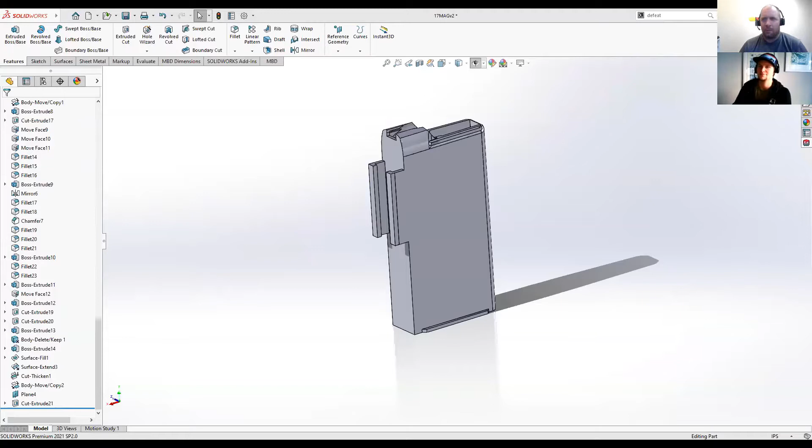I think probably for me, one of the first things that I really wish that I had known - I'll go ahead and show you actually. Can you see SOLIDWORKS? Yep, I got you. So one of the first things that I really had wished that I had known - let me go and turn these on.

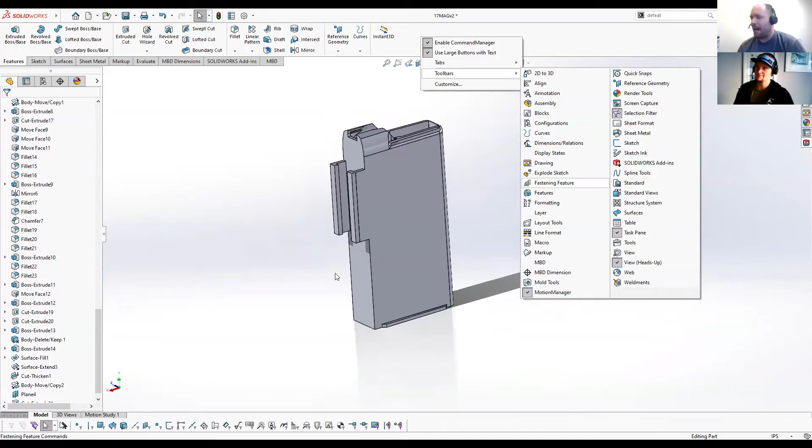Filters are one of those things that just got me. It's something I don't use all that often. So if you get a filter turned on, like my face filter or the surface filter, I'd have this filter icon and couldn't click on anything. I'd be selecting it and man, just ridiculous, so frustrating.

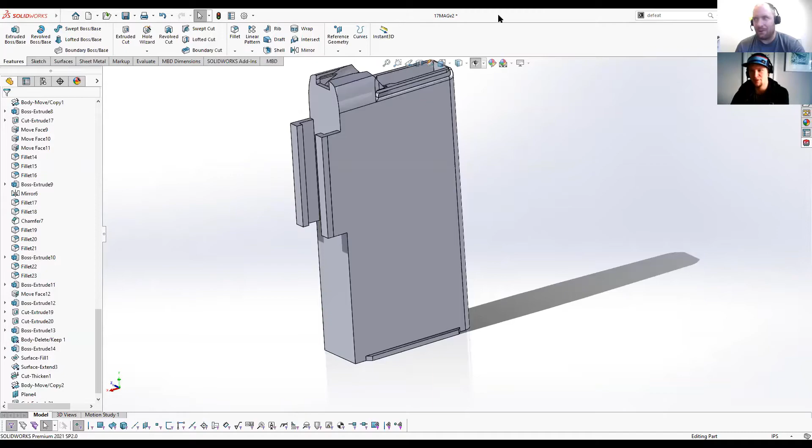What I ended up doing was honestly just closing SolidWorks and opening it back up. If I had known that all I had to do was press the F6 button and that thing would go away, that would have been awesome. That's one of those things, man, I just wish I had known. You're so right there with me, it took me a bit to figure that out too.

I remember seeing that little funnel icon and not knowing what it meant. I'm just fumbling around, pounding on the keyboard, trying to get stuff done and learn SolidWorks. And all of a sudden you can't create a sketch on a face that you selected. I did the same thing, closed the program down to see if I could figure it out that way.

I think probably the third thing after file referencing and filters, for me, I did a lot of frame design with standard structural shapes, and I used the toolbox for that. My assemblies were just garbage because of the way I used it, and I just didn't know how to do it any better. That's really what Weldments are for, and multi-body part design in general. Knowing how I could design things even in the context of the same part, relate them together, and easily make changes without having to start from scratch or break a bunch of mates and go fix stuff.

So the toolbox has some of those structural members in it, right? Yeah, I think that's the most common misconception I hear from people, that toolbox is required for frame design and that kind of stuff, which is definitely not the case. Weldments is there for everyone to use, but people new to SolidWorks think standard stuff like tubes and I-beams should come from the toolbox. It is in there, some of it, but the profiles that come with the Weldments feature are a lot more comprehensive, especially with the configuration specific Weldment profiles added a few years ago. That's a game changer. I remember my Weldment profile libraries and how many files were in there before they added that. That was a pretty big deal. I'm a fan.

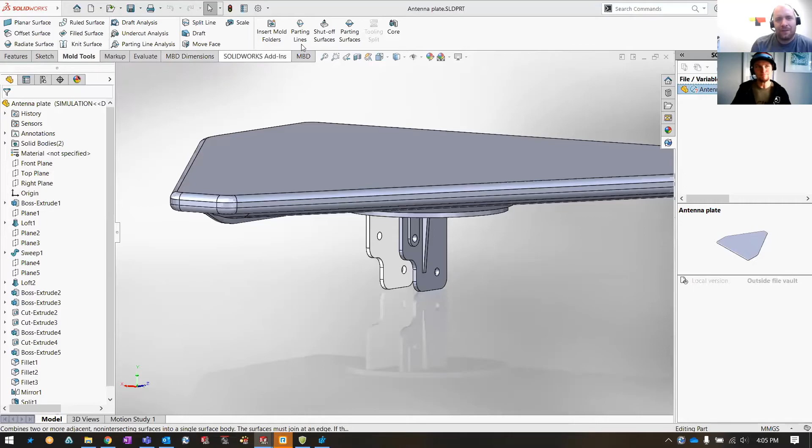My favorite feature is probably just to the right of that, the move face feature. Oh yeah, use that all the time. I love some move face. I use that one a lot for 3D printing. If you need to add a little bit of clearance, that's a sweet feature for that.

We were talking earlier, I think I threw the parts away, but I printed some parts and I didn't have the right wall thickness. I could have adjusted in my slicer, but oh man, my prints looked like garbage. I just used move face to bring that in just a little bit because I didn't really want to change my slicer settings, and the print turned out just amazing after that.

That's awesome, such an easy feature too. People might hate you a little bit when they look at your feature tree after you've done a few of them. Yeah, for sure, I've hated myself in a couple situations like that, like, where did this come from? Doesn't matter, it's just another move face anyway, so it's all good. Yep, let's move it back.

Move copy bodies is another one that kind of fits in that category too, which we won't get too far into, but I've added way too many move copies in part designs before.

Nice, so what's that put us at? We're at, I think, four things we wish we knew. Yeah, so probably the fifth one, I'd say probably the RX tool. Honestly, there's so much good stuff in the RX tool. You seen SOLIDWORKS? Yes, sir. Awesome.

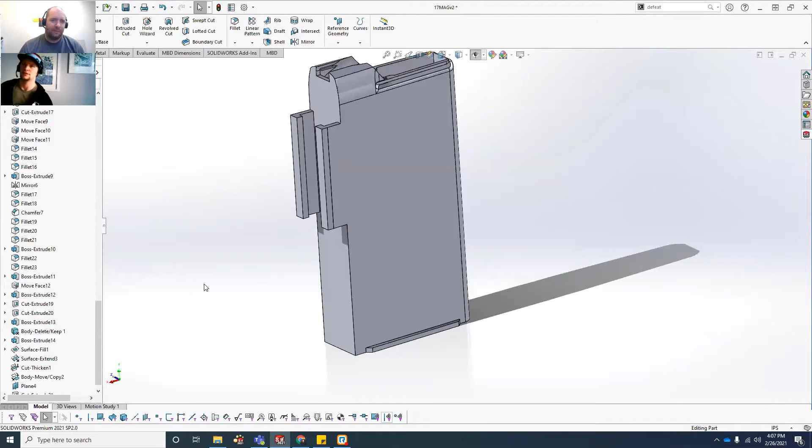So the RX tool, I'm going to close SOLIDWORKS here. You can find it from their start menu. If I pop it open, like I said, there's so much good stuff in here. If you're troubleshooting graphics card issues and stuff, you use OpenGL mode. If you think it might be a settings issue and the graphics card thing didn't resolve it, you use tools, option settings to bypass all your setting stuff. The benchmark tool, where you can run the benchmark and see how your hardware compares to other people's hardware. I think one of my favorite recent enhancements to it is probably the reliability check, where you can see what's been happening—has this thing been crashing, has it just been closing like normal, what's been going on.

I've been writing some programs and stuff for SolidWorks, so I have a little bit more unusual activity than I normally would. But yeah, that's more to talk about my programming skill than anything.

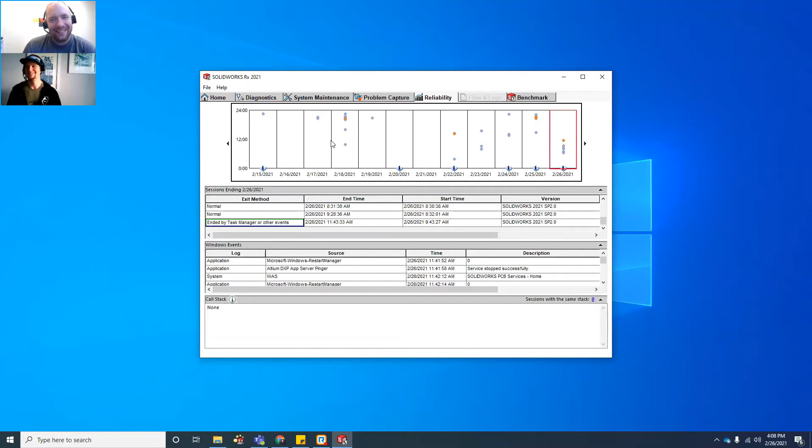Then you also have system maintenance. I don't think anybody ever uses it, but it's there to clear out all these temporary directories that SolidWorks stores things in that get full and slow things down. You also have your diagnostics tab, which you check to make sure things are set up properly, like checking your graphics card driver and making sure nothing is obviously broken on your system.

This page in particular is huge for me, because both of us are supporting different versions of SolidWorks at any given time. I have to do installs pretty frequently, so I'm constantly checking this kind of stuff, like is my graphics driver up to date. This is a great place to go for it, and you have a link right there to get your latest graphics card driver.

And then probably the problem capture is probably the one that most people think of, where you can come in, if you did have an issue, record it, zip it up, and send it to somebody.

From a support standpoint, probably the thing I didn't know was that the RX tool can open up an existing pack and go. So if I went somewhere where I created one, I can open that up and see different information about that system, all their system logs or whatever was included inside that pack and go. So yep, there's a ton of really good stuff in there.

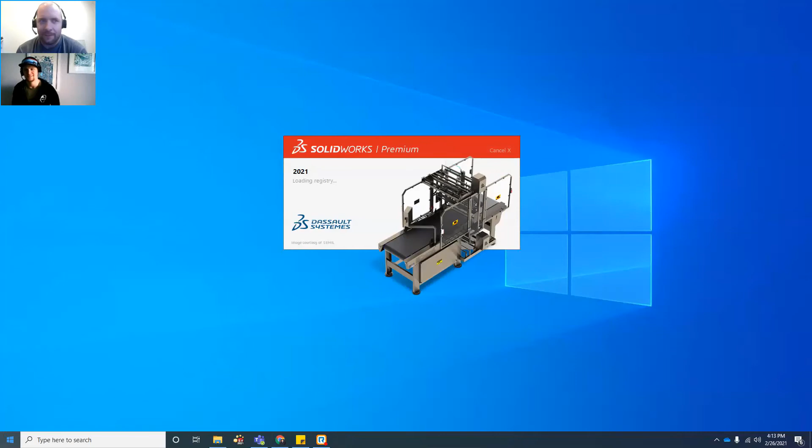So I'll go ahead and fire SolidWorks up real quick. Let's make a sheet metal part. Guys, just remember that I'm the PDM guy, so when you're seeing me doing some SolidWorks stuff, it might be questionable. So let's go ahead and just make a box or something really quick, and fully define the sketch.

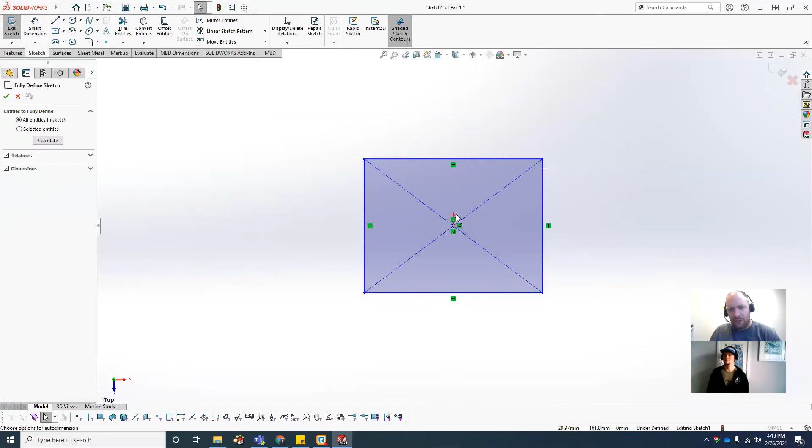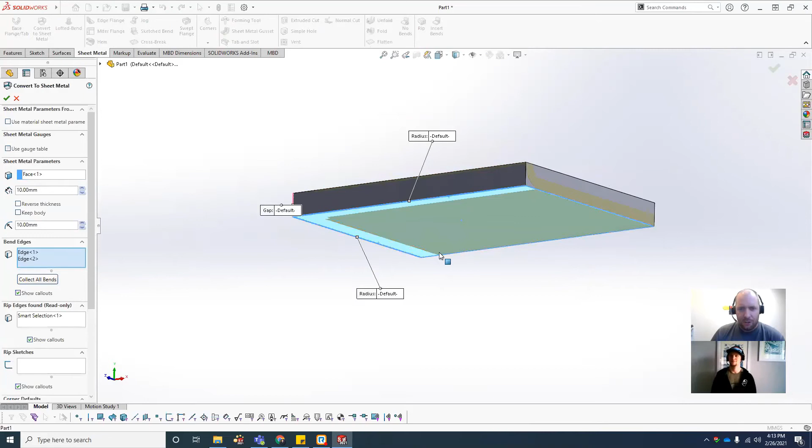And we'll just extrude it over in the metric system. I could use all of my fancy sheet metal tools, but I'm just going to use convert to sheet metal because it's fast, and I'm not really here to show you sheet metal per se, just to fix a sheet metal problem. So you took a boss extrude and made it sheet metal?

Mind blown. Got some funny looking corners there.

You actually used another one of my favorite features there too - Fully Define Sketch. I think that's another one a lot of people don't know about. So we have our sheet metal part, right? We can flatten it. Looks good, right?

Let's just go ahead and save it. Just gonna call it part 1 because I can't think right now while I'm trying to click and talk and do other things. So I like B-size drawings.

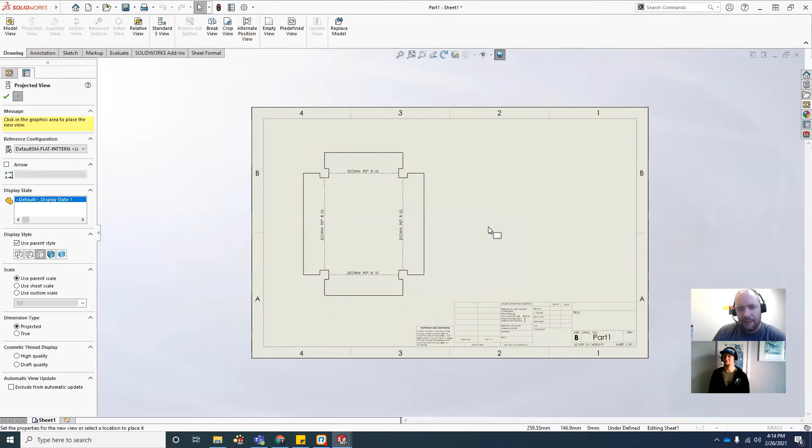And we can see that, so we should be able to just pull out our flat pattern right here. Boom, right away. Got our flat pattern. And from our view palette, we could also just throw in an ISO or something, maybe.

Yeah, so that's part of the drawing automation that's built into this, right? You got your part where you're able to access the flat pattern, but it's going to throw it right on your view palette there, so you can just drag and drop on the sheet real easy.

And this is, I think, where people go wrong right away when they create the drawing. As soon as I drop that view on there, that's where things go wrong for people. In my model, all I had was a default configuration, right? As soon as I drop it on a drawing, it creates a derived configuration underneath the default configuration - this flat pattern.

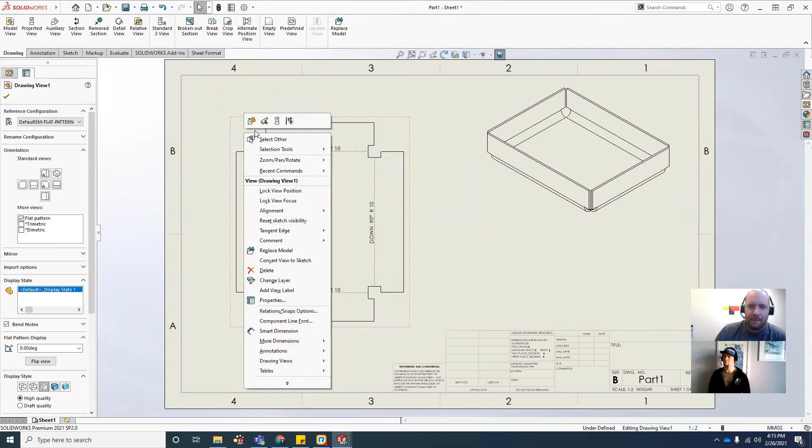So how do you get in this scenario where you can't flatten the part? Basically, people will open this up and start making changes to it. But they'll be, and not even realize they are, in that derived configuration that's active. They'll come in and essentially configure that feature by suppressing it, right?

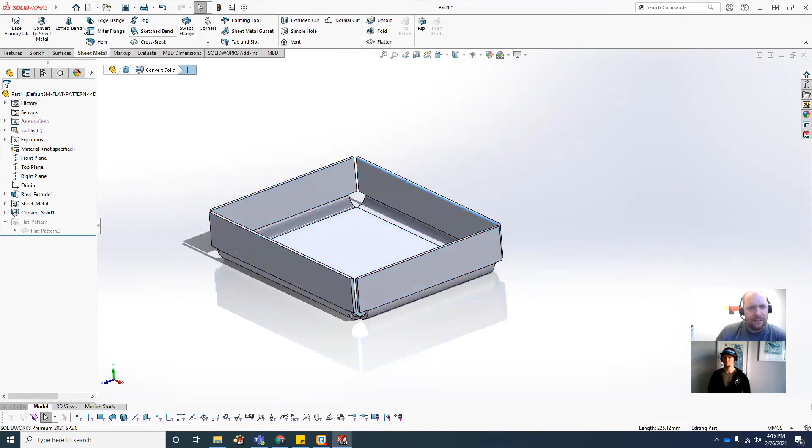And then they might just come in and add a flange or something off of that, right? And they'll go back to their drawing, and they're like, well, this is the flat pattern, I don't see why that's not working. It's because the configurations are wrong now, right?

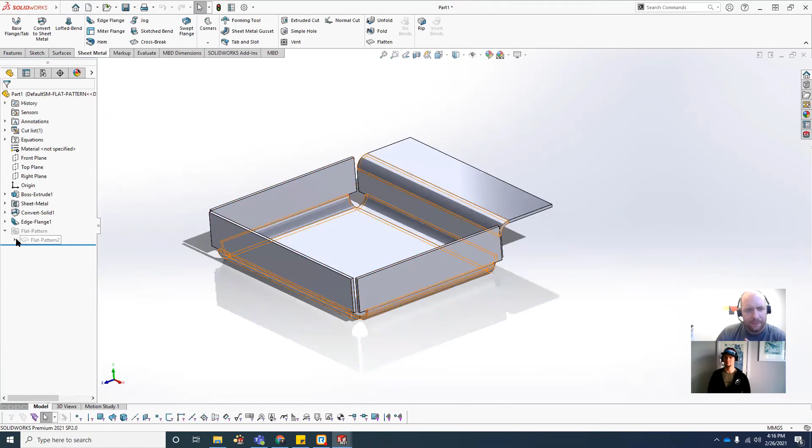So you got to open this thing up, go down to that flat pattern and unsuppress it, right? And what I usually recommend is to just look at your configurations before you go back. And if it makes it easier, honestly, what I do is use this flatten button, unclick flatten, and go back to your drawing, and everything should be fine.

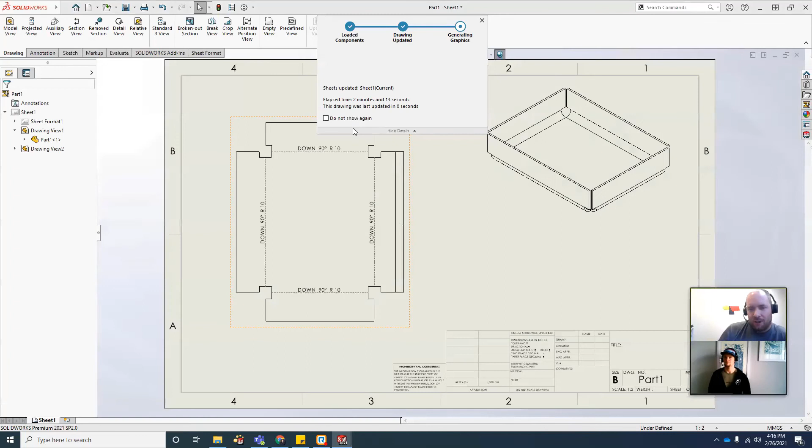I think the way you showed it there really resonates with a lot of people. If I go back into that part file, the first red flag should be: why is this thing flat right now? It wasn't flat when I went into the drawing, right? So the first thought that pops in their head is, okay, I'll just go ahead and suppress that flat pattern. Right, they're kind of overlooking what they actually did there and modified that derived configuration.

Because I think, at least when I teach the essentials class - it's been a little while since I've done that - but the first thing I show people when creating and modifying configurations is how you manually configure things. So I create a new configuration, then go and suppress the features I don't want, and toggle back and forth between the two. And that's essentially what you're doing, right?

Yep, exactly right. Well, I think that was a good walkthrough, man. Pretty common question that comes up, and hopefully that sheds some light on it for people about why their drawing might be messed up on a sheet metal part. Nice, cool, well I think that's the answer to that question.

So, Brandon, what do we have planned for next time? Well, I kind of alluded to it a little bit already - we're going to get into the one that everybody loves to hate, and that's the SOLIDWORKS toolbox. So there's a lot of advantages to it if you know how to use it.